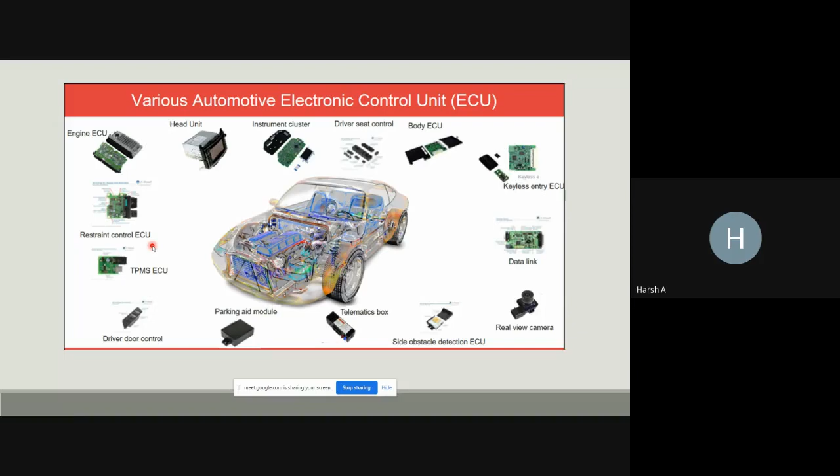So today we'll be talking about how the actual software that is integrated into the ECU is developed. And this particular process that we are talking about, model-based development, is not specific to any ECU. It is being used in development of all the ECUs that we are seeing on the screen right now. So almost all the ECUs that we see in the vehicle are developed with model-based development.

So as we discussed, the modern day vehicle has up to 80 electronic control units within it, and that is why this has been of utmost importance in any vehicle development cycle. And model-based development is something that has been used for the past 10 years, I would say, in almost all the automotive companies around the world. So some of the advantages that MBD gives us are a very quick development cycle, decreased cost, improved performance, and more control of the features and of the mechanical components.

So when I say improved performance and improved coverage, what kind of flexibility it gives the manufacturers is, for example, in the engine control unit, the amount, complexity and sophistication of the code present in the ECU sometimes allows the engine manufacturers or the OEMs to use the same engine for a variety of purposes. So let's say a 2-liter engine is being used by a company and they are just making changes in the calibration parameters or in the software that is controlling that engine, and with the help of that they can use the engine in n number of applications.

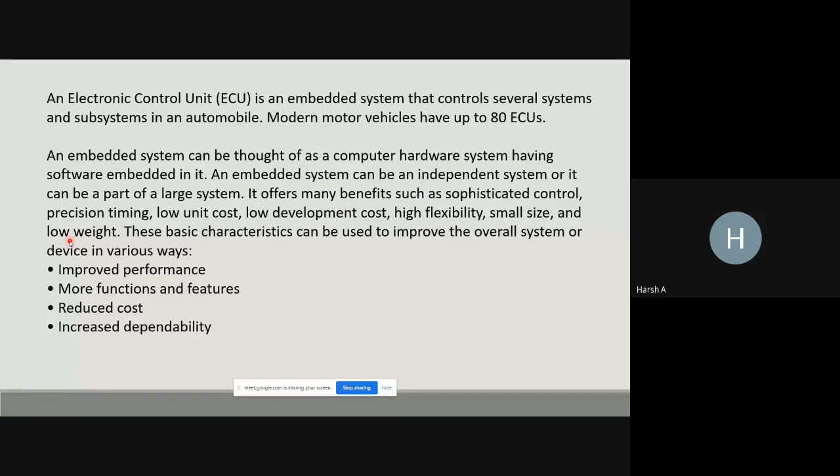So now these ECUs, apart from working in harmony with all the other ECUs, also need an input and output mechanism along with them. So when I say input, there are n number of sensors present in a vehicle. All these sensors work as input parameters to all the ECUs. It is not that one sensor would just be giving an input to one ECU. It would be giving input to multiple ECUs. And similarly, ECUs, after receiving that input and based on their control logic, give out an output. And based on these outputs, all the actuators are controlled in a vehicle.

So if we go over these sensors, I've listed some examples of sensors that are used in almost all automobiles. So temperature sensors, basically temperature sensors are used a lot in vehicles.

They are used to sense the engine temperature, exhaust temperature, intake air temperature, the cabin temperature of the vehicle, the outside air temperature. So these are some of the applications of the temperature sensors.

Position sensors, speed sensors. Speed sensors would be used to measure the engine speed, the wheel speed. So the speed sensors would work as an input for the ABS module, for the engine control unit, for the transmission control unit. The humidity sensor, which is present inside the cabin, will be working as an input to the AC compressor.

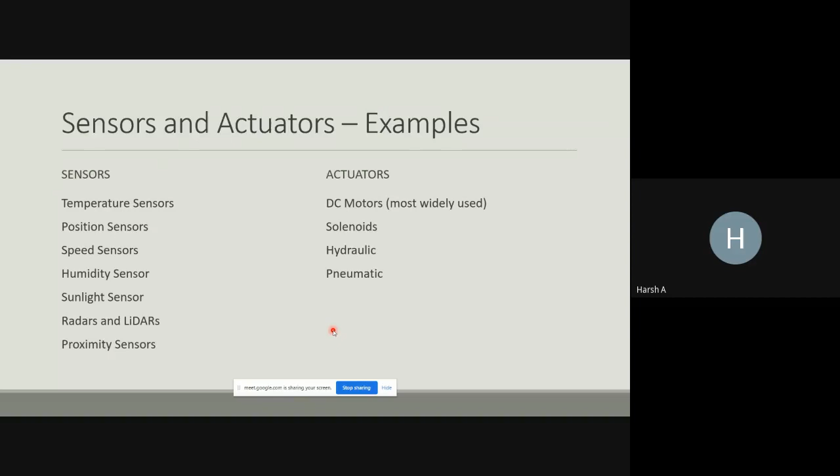So now coming to the main topic, what is MBD? So model-based development is basically a software development methodology which is based on the V cycle of the software development process. We will come to that point, but V cycle is basically a software development cycle which was developed to provide a testing of a system while it's being developed.

Earlier, what used to happen? Someone is developing a system, someone is developing a product, they used to develop it, and after the development is finished, after the prototyping is finished, then it used to be tested. So this used to increase the cost a lot, and this also used to extend the timeline of the entire product development cycle by a huge margin.

But the V cycle, how it works is it works hand in hand. So at every stage of development, there is a testing and validation in parallel with it, which helps us reduce the number of errors and issues in the system before we actually build a prototype. Okay, so this is basically a brief overview of what MBD is.

So the MBD process, if we go in a chronological order, the first part of an MBD process would be a requirement analysis. So let's say what is the requirement. These requirements are developed by all the product development engineers working in any company as to what they want to achieve out of the system.

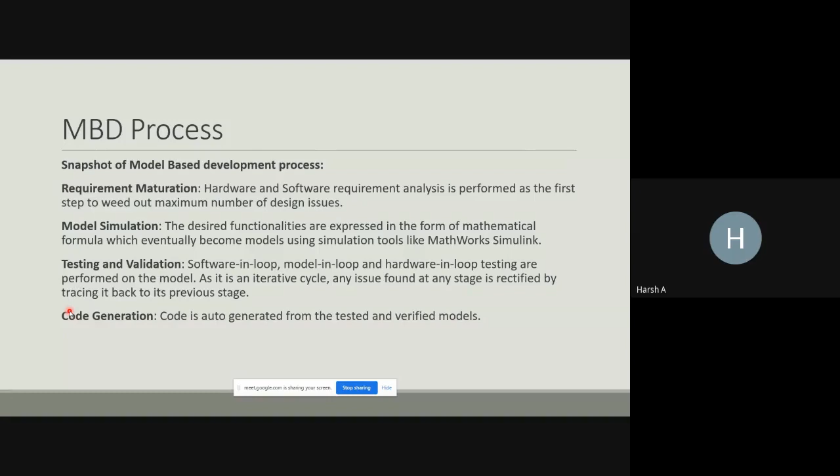So after these models are designed, they are tested in just a computer environment. No hardware is coming into the picture yet. This is what we call MIL testing. As we go ahead, I'll quickly explain what all these testing phases mean. A particular model is developed for, let's say, one strategy, and an ECU would have a number of strategies ranging from 100 to 500. All these 500 strategies would have their own individual models. And all of these models are integrated to form one whole model package for a particular ECU.

Let's say if we are talking about an engine control unit. For an engine control unit, there would be n number of strategies which would go into that model. And when all of these models are integrated, what we get is called a model package of that particular engine control unit. And that is tested just on a computer level, just on a model level, within the MATLAB Simulink interface. It is known as model in loop testing.

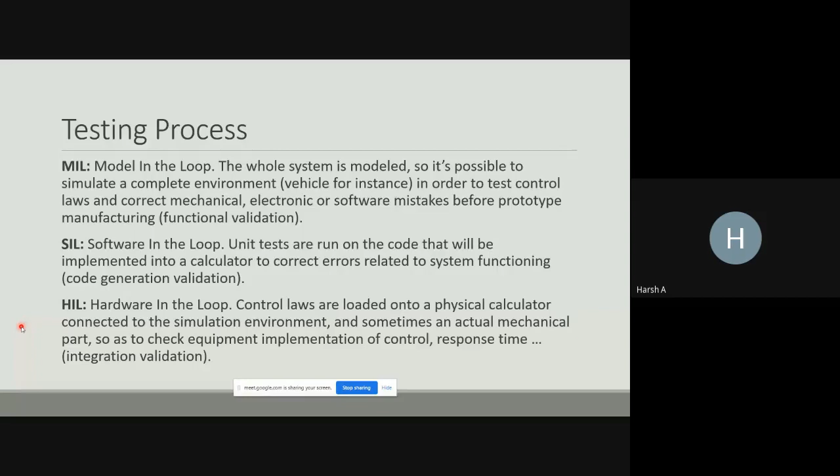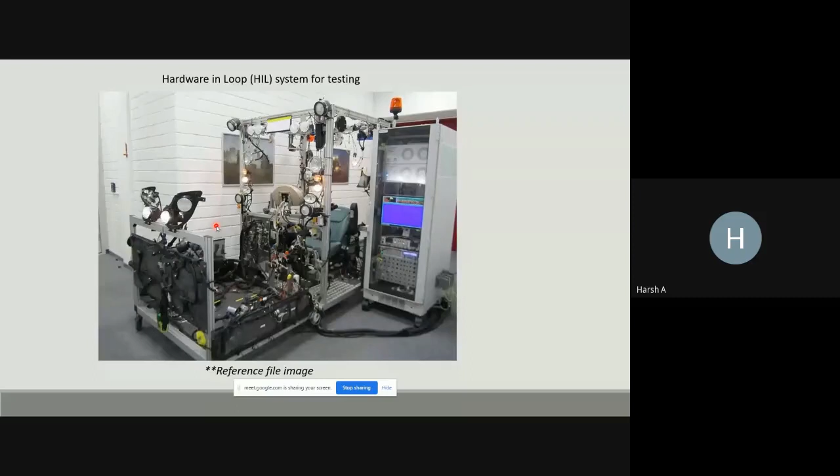So now the entire process that we talked about, let's talk about it in an example form to better help understand what the actual process is. So let's take a basic example of a thermostat. A thermostat is what is used in all the ACs that we have in our homes, even in the AC and HVAC units that we have in our cars. So this is not entirely accurate or entirely complex. This is just a simpler and very basic system to help everyone understand.

So let's say that we want to build a thermostat model. A thermostat is something that would control the temperature of a room or a vehicle. So one of the requirements that one would build based on this thermostat is what is the desired temperature. Okay, so some of the requirements are what do you need in order for a thermostat to work.

So even in the ACs that we have in our homes, we set the temperature. Let's say we want to keep it at 22, we want to keep it at 20, we want to keep it at 18. Even in our cars, we want to keep our temperature at high, low, or 25, 27. So these are all the desired temperature set by the user.

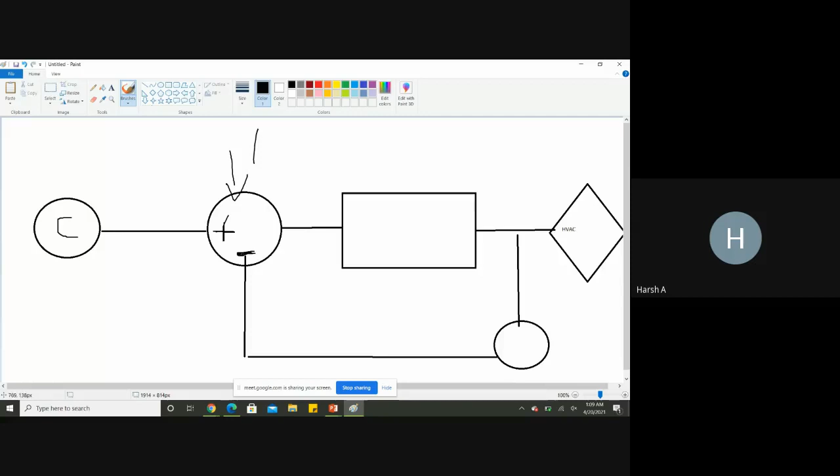Add block. So it is basically taking an input from the constant block, which is given by the user. It is continuously sensing the temperature of the room, which is being supplied by the sensor. It is constantly trying to get a delta out of these two. So basically one is being subtracted from the other. This delta value is then being supplied to this control logic.

This control logic basically works based on a mathematical equation. Based on if the delta is zero, it works on either turning on or off the HVAC unit. So this is basically how a model would look if you were to model it in the MATLAB Simulink interface based on the requirements that we just drafted.

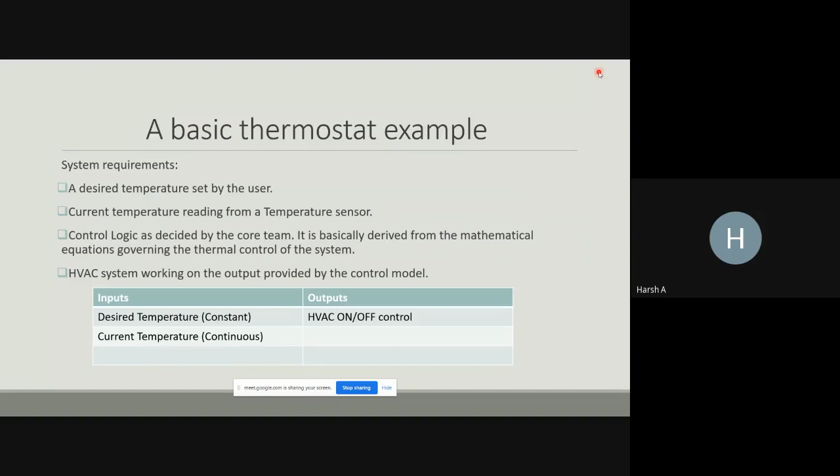So this is basically how the development process goes on in the industry, although it is a lot more complex, but this was just in simpler terms to help you all get started and understand the concept. So these are some of the tools that are being used in the industry. MATLAB Simulink is the most widely used tool, by almost all the industries.

Some of the other tools we have: Stateflow is also a part of the MATLAB Simulink interface, and Stateflow is basically for complex control logics, and I would say it is also very widely used hand in hand with MATLAB Simulink. GT Power is another tool by a separate company which also serves the same purpose as MATLAB Simulink. And there are also custom tools, so custom software developed by companies.

So let's say if we're talking about Tata or Mahindra or any company. These companies would also have their own custom tools, which they would have built as per their requirement to model and develop their control units. So this was a brief overview.

I'll also quickly show this. This is actually very interesting. So this was the project which I did during my master's. In this project, we made a control logic diagram. The entire process which I just explained is included in this project. We had basically modeled an automatic transmission control unit. As in the US, almost all the cars have automatic transmissions, so the transmission control unit is something which is very important.

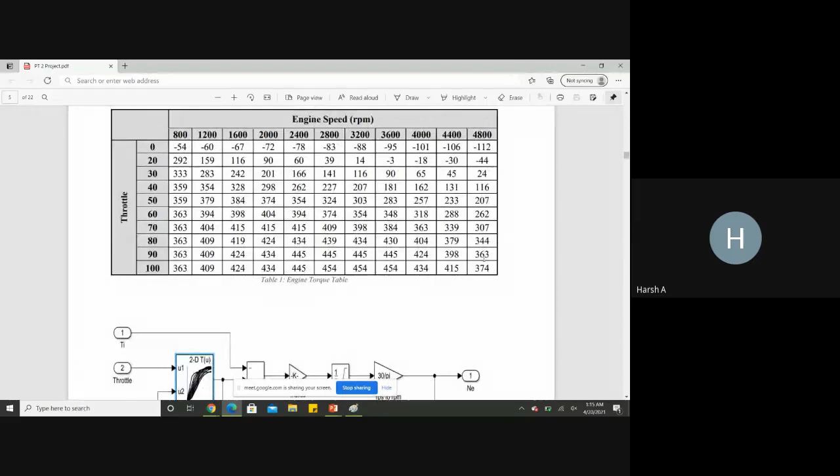So this image that you see here just includes this entire 2D table. What this control logic is doing is basically taking the throttle as an input and doing some amount of calculation. This is basically a mathematical equation, an integral equation, which is just converted into a model. This model then gives out an output of engine speed as well as the torque of the engine.

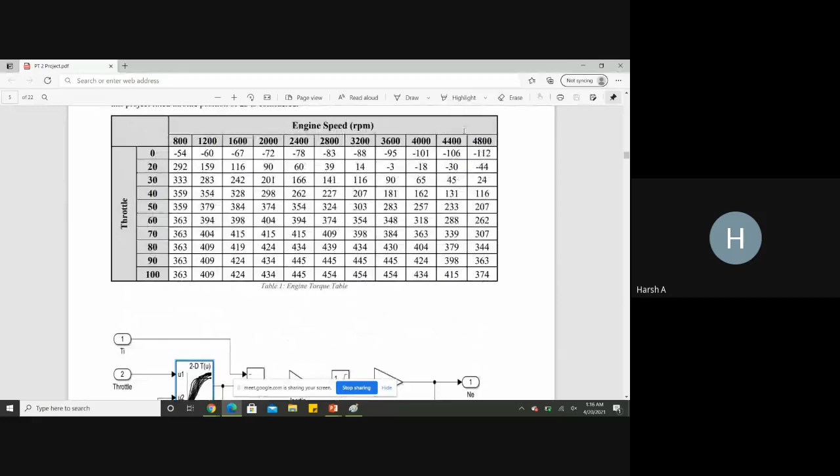Engine speed is just the direct output that we are getting from the x-axis of this table, but the torque output is actually what we are interested in. So if you can make a note, from this model the main output that we are interested in is the TE, the torque of the engine.

So this is a perfect example of how multiple models are integrated together and how the output of a particular model is being used as an input by some other model. This was the engine model, which gives out TE as an output. Now this NE output is being directly used by the torque converter model.

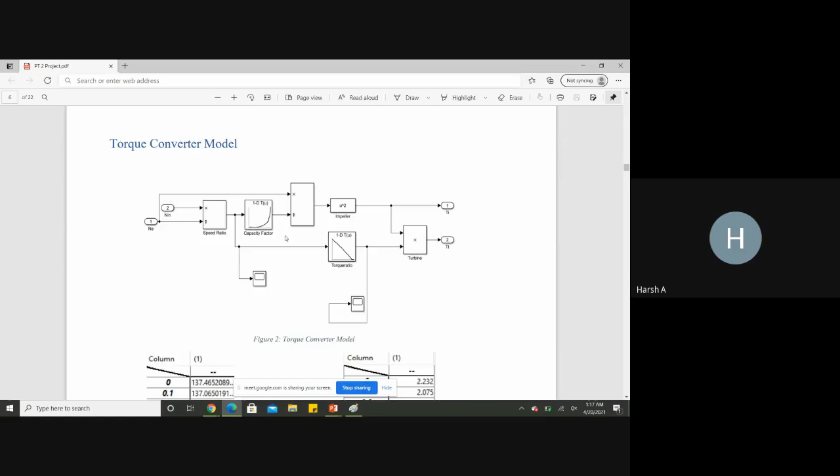As you all would know, in an automatic transmission vehicle there would be no clutch, but there would be a torque converter. So we also modeled this torque converter based on the equations that we were given. This entire region that you see over here is just mathematical equations converted into the model. As we can see, the NE, which was an output of the engine model, is being used as an input in the torque converter model.

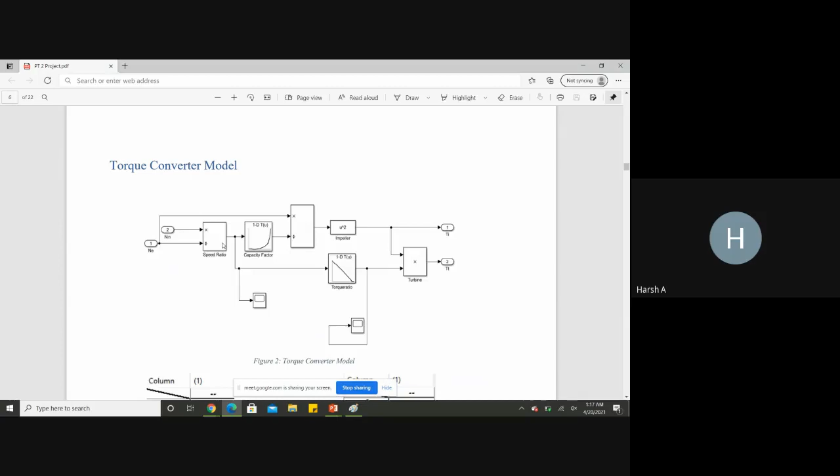And these 1D tables are basically some coefficients and ratios of the torque converter, which is design intent. It has nothing to do with the control logic. So based on the equations and the control logic that we have provided in this torque converter model, it is giving out two outputs, the torque of the turbine and the torque of the impeller, Ti and Tt.

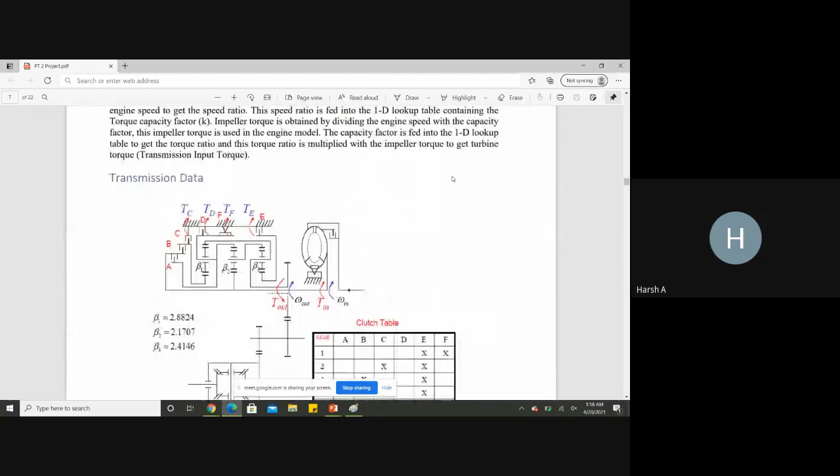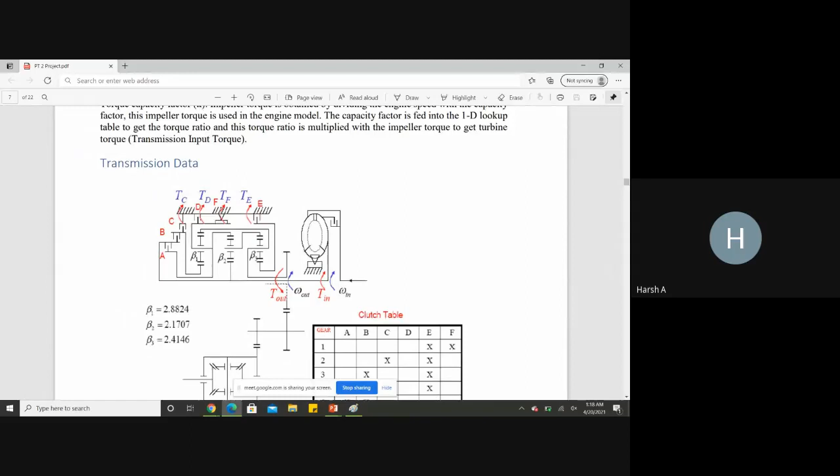So the engine model gave out two outputs, Ne and Te, and Ne is being used by the torque converter model. Now we go ahead to the actual transmission model. What we see on screen right now is a stick diagram which represents a six-speed automatic transmission. This type of data is available with the transmission manufacturers or the team who is supplying the actual physical transmission gearbox to us.

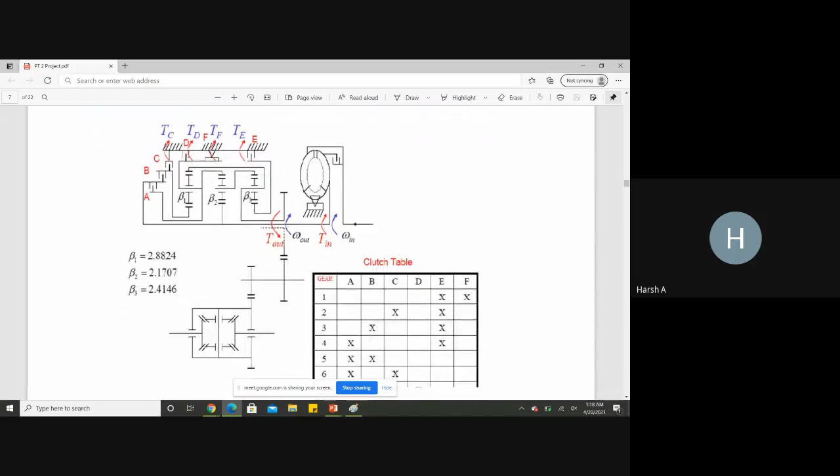So these are basically all the gear ratios of the automatic transmission. Based on just this data, we actually simulate first mathematically how the transmission works and how the actual shift takes place.

To give a brief overview of how automatic transmission works: in a manual transmission vehicle, we change the gears by hand. We decide when we want our gears to be changed from 1 to 2 to 3 to 4, and it varies from person to person. Somebody likes changing their gears late, somebody wants to shift to second gear early. So all of this varies from person to person in a manual transmission vehicle.

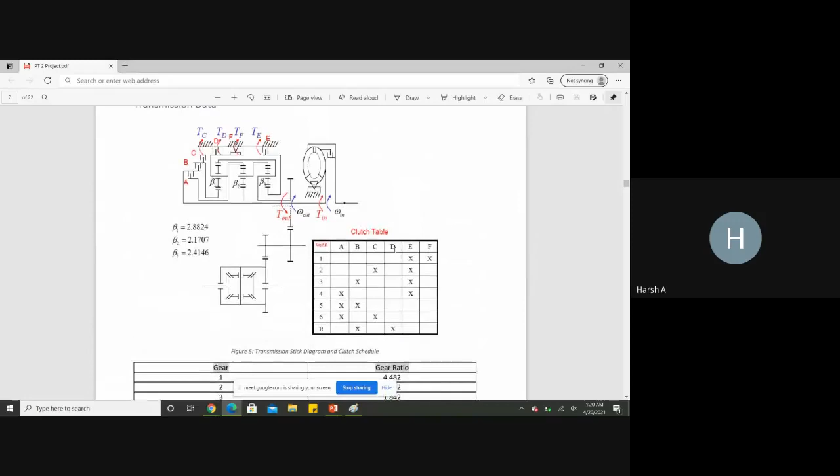Whereas in an automatic transmission vehicle, this would all be taken care of by software which would sense the vehicle speed, the engine speed, the throttle input, the torque, and the wheel friction, and decide when it wants to shift from 1 to 2, 2 to 3, or from 3 to 2. So these are the set of mathematical equations I was talking about earlier, which represent the dynamics of these gears and these shifts from 1 to 2, 2 to 3, and so on.

So these mathematical equations are hand calculated, and what we get in the end is basically these intermediate equations. So these equations are what we are actually going to script in the form of code, and that code we are going to integrate in a MATLAB Simulink model, which would help us complete this entire model package. So based on this entire equation, we would then be making a MATLAB model.

So if I directly show the actual model, yeah. So this is the MATLAB script for shift logic. So all the equations we just saw, they would all still need to be coded in the form of a MATLAB script, and that script is what we can see here. It is basically an if-else logic that we design. So this entire code is what we have incorporated in this block.

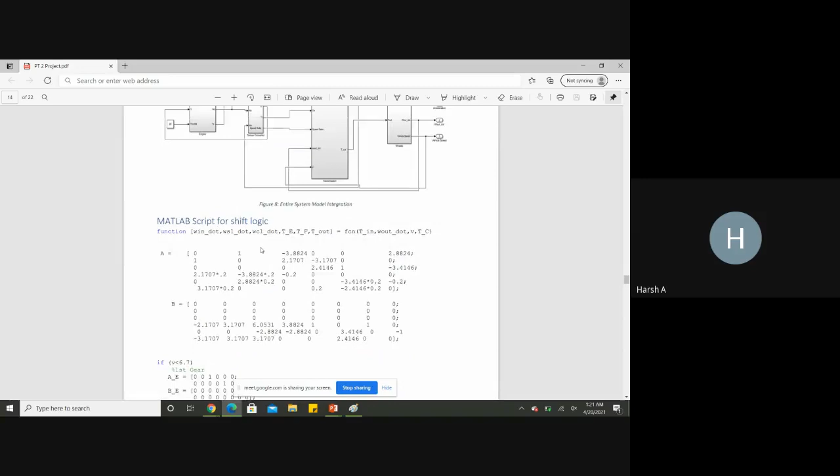So if you see this transmission block, it is basically a custom block. So MATLAB Simulink also has this feature of creating custom blocks. Let's say that you want to create any type of software, any type of code. You can make that code and you can create a block for it and you can save it for later use. So I can save this transmission block and I can use it at n number of places. So once we created this entire script, we basically integrated that into this block.

This is the engine block that we just saw. So if you see in this global view, we are just seeing the entire engine as a simple block. But if we were to further expand it, it would look like this. So when we just collapse it, it gets broken down to the smaller view. So this is the engine block, this is the torque converter block that we discussed. This is the transmission block. The entire transmission block contains this script, and this is the wheels.

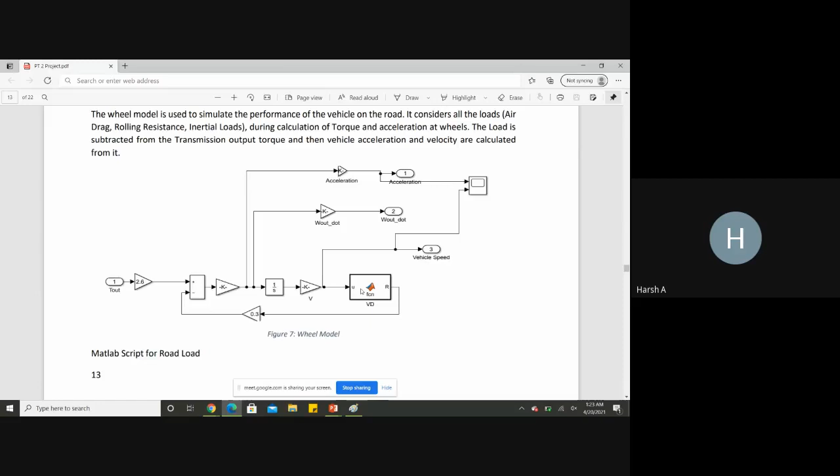So what we term as wheels is basically the vehicle dynamics calculations. It has all the inputs like acceleration, the angular velocity, the angular output of the engines, and the road loads. When I say road loads, I mean all the loads acting on the vehicle: the wind loads, the coefficient of friction of the wheels with the roads, and the actual inertia of the vehicle. So all these loads are considered and integrated into this wheel model, which is also a vehicle dynamics model. So how these individual models are integrated, this is the perfect example of that. And we are getting output as acceleration, angular velocity, and vehicle speed.

So if we try to align what we discussed earlier in the presentation with this concept, this is what we would call a completed model. So we still don't have any transmission with us. We still don't have any transmission control unit with us. Everything is entirely just on a computer. So after we model this, we can execute it. We can just play it like we would play a code or run a software. So after we play it, we execute it, we actually get results in graph form.

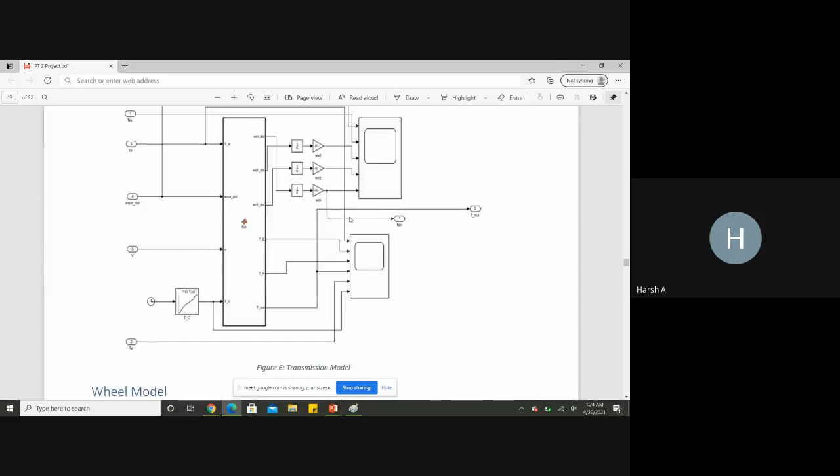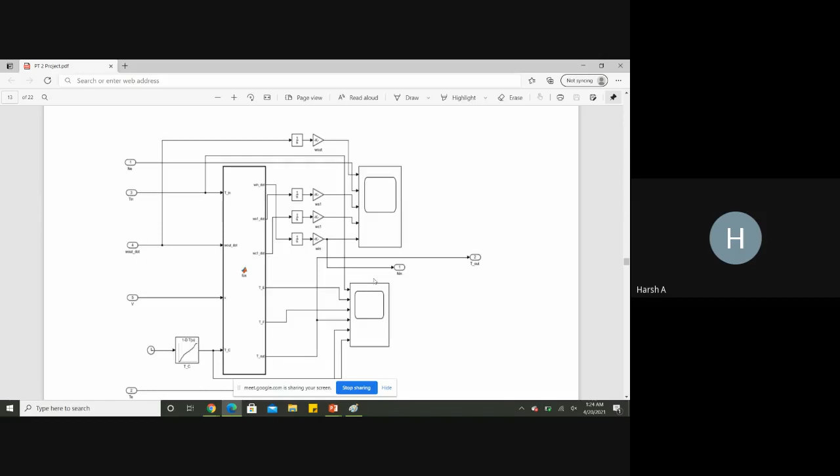So as you can see, it is not seen in this code, but in the transmission model, we have what we call scopes. In basic terms, like what an oscilloscope is. It basically captures the graphs for us. It basically captures the signals. These signals are basically the outputs of all the ECUs. So these scopes are capturing all the signals and displaying them in a graphical format.

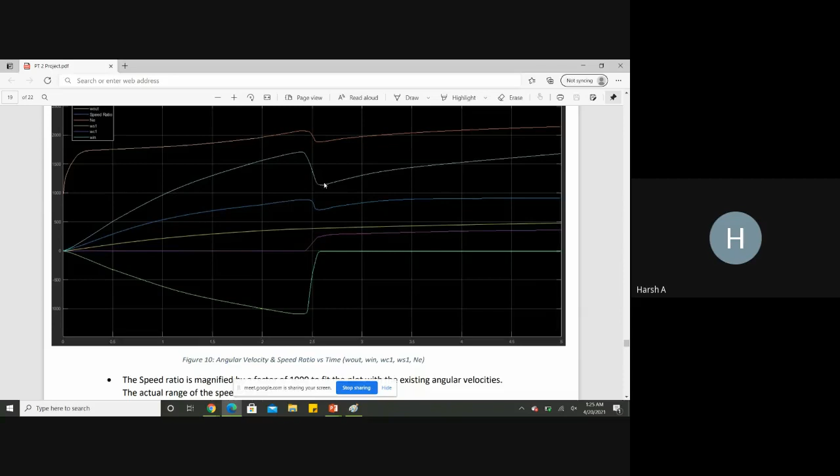So the speed had a massive drop, and then it again started shooting back up. So this is how, based on the graphical interpretations, we can validate that the model is working fine. So the further stage, although we didn't do that, is how it would look: once these models are validated and found to be working perfectly, they would then be converted into C code.

That C code would be integrated with a base software, what we would call in simpler terms an operating system. This integration of the model and the operating system would be called a software package. That software package would be installed on the circuitry, and that circuitry would in turn control the actual transmission on a vehicle.

So this was basically the entire model development process, just an introduction, but I hope that it will help you guys get started. I used the example of thermostat and transmission, but this is not just limited to that. Almost every logic present on the vehicle, almost everything that you do in a vehicle, even if you try to set your seats, even if you try to move your seats,

when you're pressing the volume up, volume down button, the window up, window down button, the button to release the trunk of the vehicle, when you are pressing the brake and the rear brake lights activate, all of these things are taking place through CAN communication, through the ECUs, and all these ECUs are communicating with each other via CAN. So yeah, this was a basic overview.